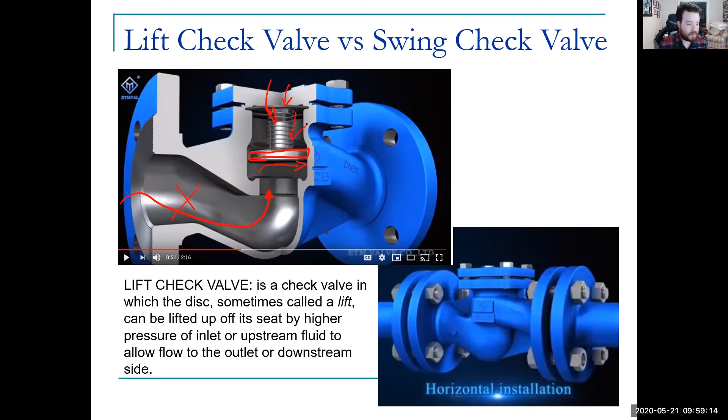A swing check valve operates in a similar sense, but there is no spring. What it's utilizing is the weight of the disc.

A check valve in which the disc is a movable part to block the flow, swings on a hinge either onto the seat to block reverse flow or off the seat to allow forward flow.

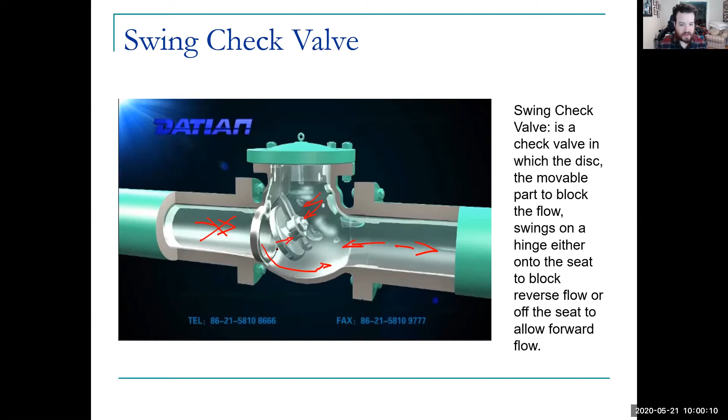So same principle. You have flow going in this direction. It's going to be pushing against this disc, and you're going to have flow that's going around it and keep going. And as soon as this is lost, any flow that's going to go in reverse, this swing check is going to come backwards with the weight, and it's going to close off and not allow any backflow.

So let's talk about heat exchangers and coolers. Heat exchangers transfer heat from one substance to another. One substance needs to be hotter than the other. Heat flows from hot to cold, and the greater the temperature difference, the faster the heat transfer.

What is it called, a heater or a cooler? And it depends on what heat transfer you want.

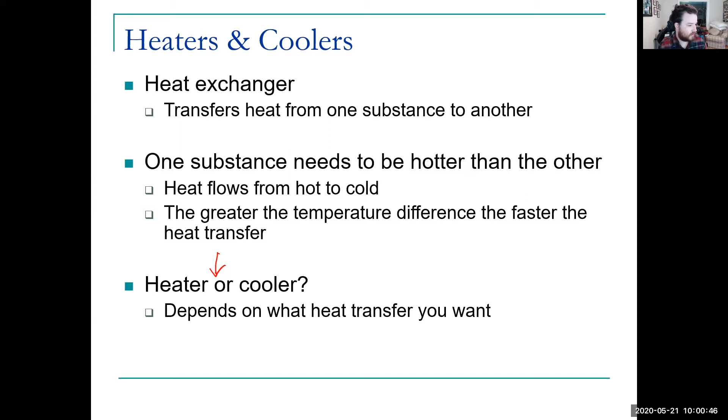Classification is by the path of the heat flow. Indirect or surface, through the plate, tube, or other. And direct contact is fluid to fluid.

And then relative direction of fluid flow. So you have parallel, you have counter, and you have right angles as a cross flow. And then contact, again, direct or indirect. And what do we mean by parallel or counter or right angles?

So starting with right angles, what you'll have is that two pieces of your flow will look like this. You have your hot fluid, and then you have your cold fluid, and they're flowing at a right angle to each other.

Parallel is like this. Now remember, these are still all in non-contact with each other. There's going to be plates separating or tubes separating them. So parallel is like this right up here.

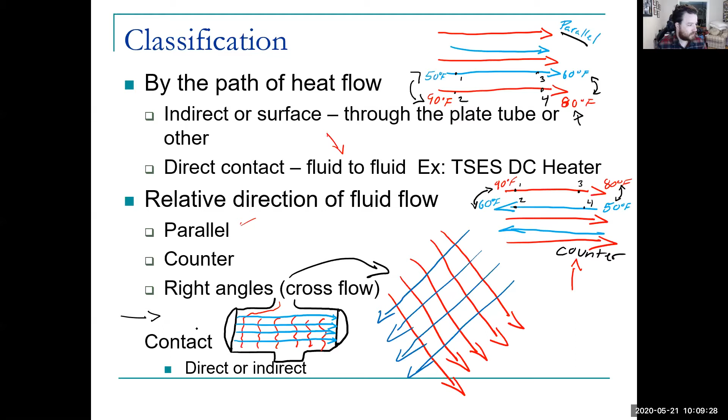Okay, so classification continued by the number of passes. You have single pass, that's fluid in one direction only, so they just pass each other once. Two passes is the fluid changes direction in the second pass. Four passes, multiple times, and additional passes.

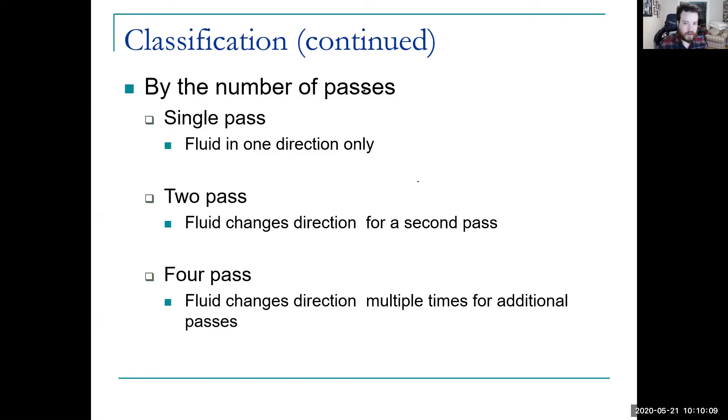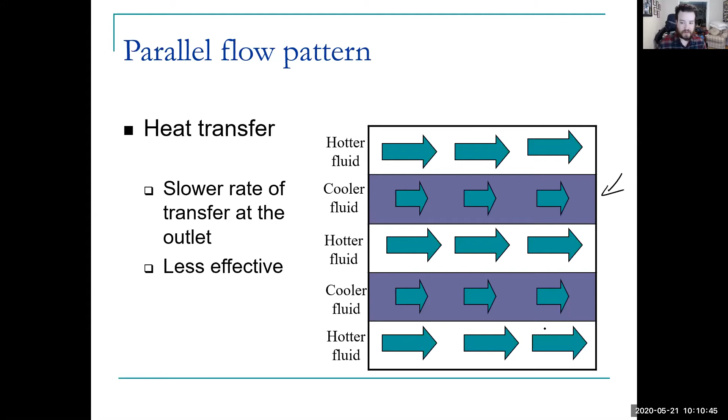Let's go on to parallel flow. Here we go, everything that I just went over. So basically we have the hotter fluid, the colder fluid, slower rate of transfer at the outlet, less effective. Counterflow, less area required to remove heat, heat transfer equal at all points. It's the most common, like I said, it's the best version. You're literally not changing anything inside of the mechanism. The only thing that you're changing is the direction of one of your fluids, and you gain so much.

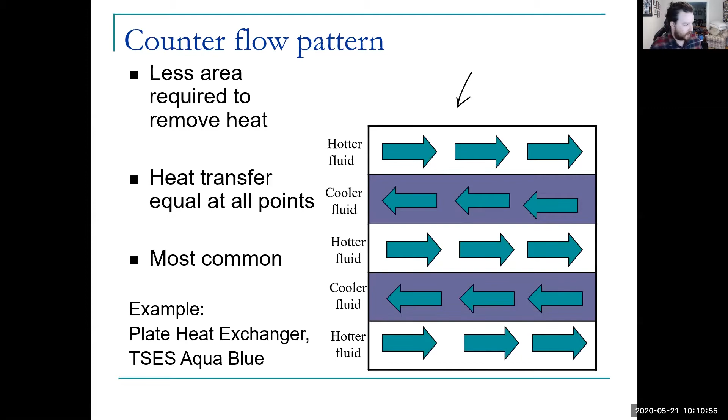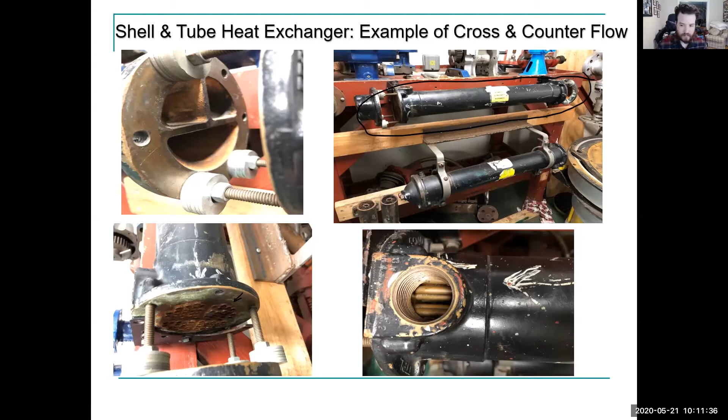Someone say something? Okay, no, it was just you. It kind of glitched out. Okay, sounds good, all right.

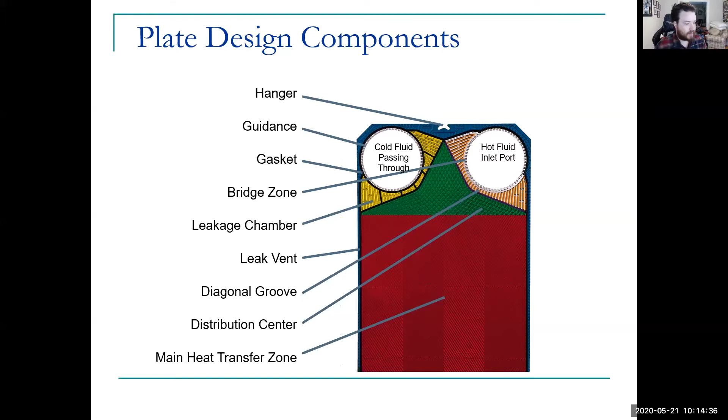Could you go back to the slide that had the side view? There's a question in the chat that says, can we change the gasket if it fails, or should we just change the whole plate? Pretty much those things are glued on, so you're going to have backup plates, and you can remove one of the plates. You just basically would order a new plate.

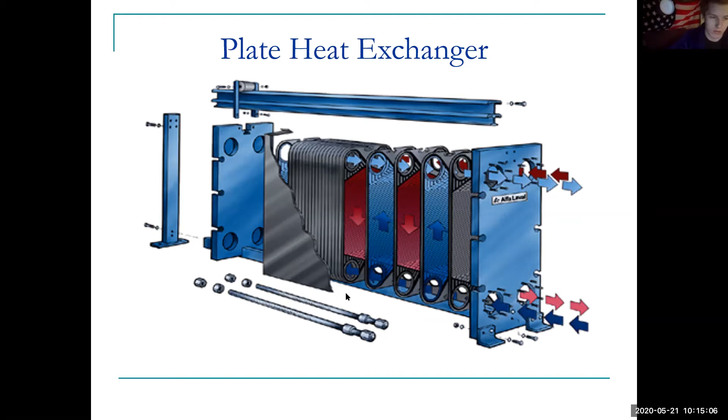So you have these high performance seals. You have your gaskets along the side, and you can see basically here where it's making that seal. Not only is it sealing the fluid from coming out, it's sealing the fluid from each other as well.

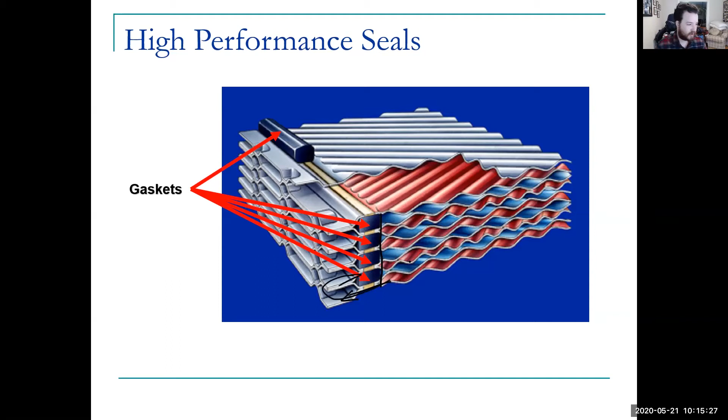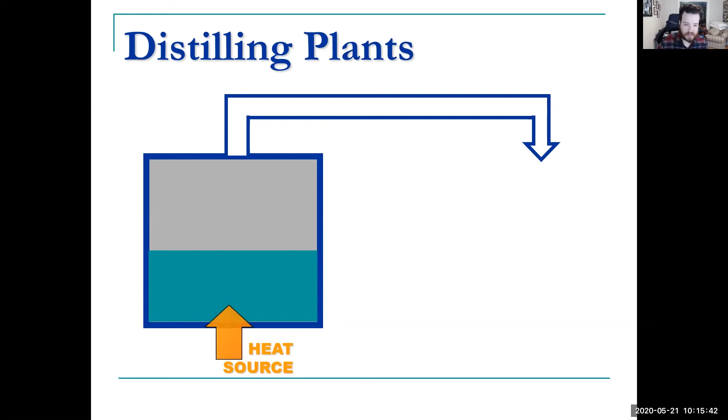So let's get into distilling plants. A basic distilling plant: you have your heat source, you have your salt water. Remember, we're going to be utilizing salt water. We turn it into a vapor. That vapor is going to be just water at that point.

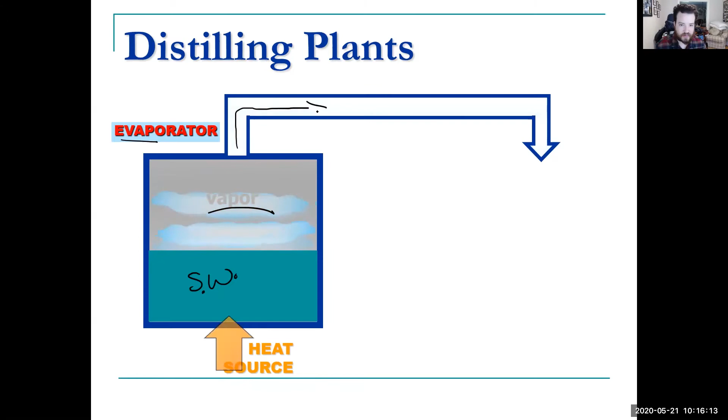This is called our evaporator, it's evaporating. So that vapor goes through a pipe, it's removed from the evaporator, and as it goes through a pipe it goes into a condenser. It's condensing back into a liquid, and we're removing our heat that was given to it in its heat source.

We have now turned it into a different type of liquid. It's called a distillate, so it's distilled water.

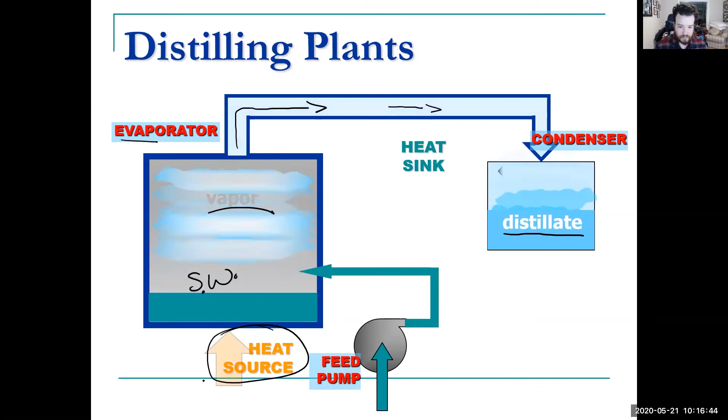Now, as we remove more and more salt water, we need to add it back in. So we have something called a feed pump. We have our salt water supply, it's entered in. And now we have something called a distillate pump, and we are removing all of our distillate that's been created, and that's going to our distillate tanks or our potable water tanks.

Now, the big byproduct that comes from this process is brine. When you boil salt water, part of the process is yes, you're getting clean vapor, clean H2O coming from it. But what you're leaving behind is all of the minerals, all of the salts, everything that's not hydrogen and oxygen. That's called brine, and we have to get rid of it somehow. We have a brine pump, and basically all it's doing is taking the brine and ejecting it overboard.

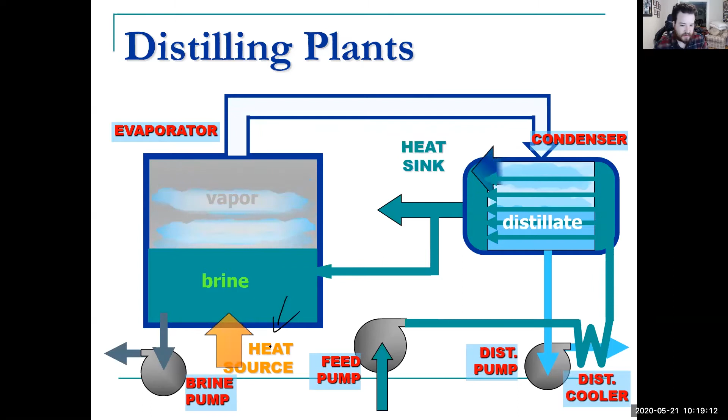Instead of using just regular old salt water that you're not going to use again, you might as well use the heat that you're going to not use after it goes into the condenser to preheat your feed water. So you're banging out two things with one stone: you're cooling your distillate into a liquid that's pumpable, and you're heating up your feed water.

And the last thing we also have here, if you look, what's going on at that point? What type of heat exchanger are we doing here? We have a cross flow right there, but we're also doing something else. Our big heat exchanger, if you were to put a circle around this whole piece, what also is happening? It's another type of heat exchanger that we have.

Is it parallel? Nope, parallel would be as if they were flowing in the same direction. This is going to be counter. But that's the giveaway right here in this little spot. We have our coldest point going against the spot that's not at the hottest.

All right, any questions on this before we go on?

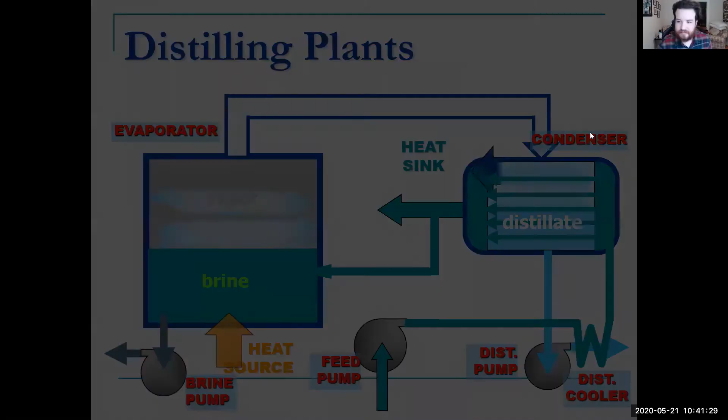So let's go on about distilling plants. As we go through, we're going to talk about high pressure and low pressure systems. High pressure is anything that's above atmospheric.

Atmospheric, as we've talked about before, is what we're standing in right now. It's at sea level. And thank God this is a shipping class because everything will be at sea level. So we only have to worry about our absolute pressure, which is at 14.7 psia. Now, if that was PSIG, or gauge, that would be at 0.

Now PSIG, as we talked about, is pressure gauge. It's a different type of reading you can get, different types of gauges out there, where zero point is 1 atmosphere. Now we also have inches, how it can be measured, and that's when you go into vacuum.

And then what we have here is our boiling point of water in Fahrenheit and in Celsius. So as you see, as we go up in pressure, we are going to be increasing our boiling point. And as we decrease in pressure, we are decreasing our boiling point. So they're directly related to each other.

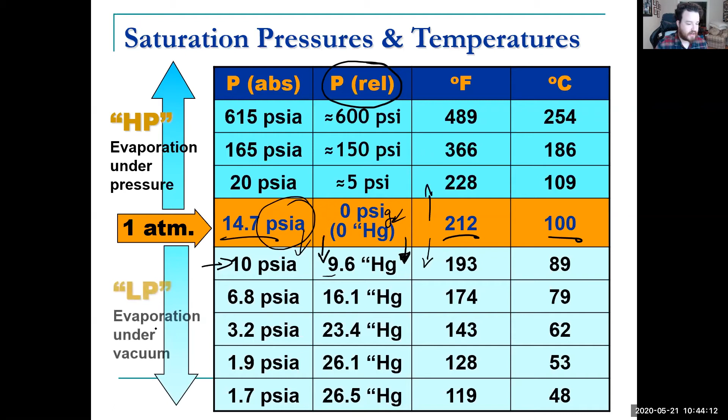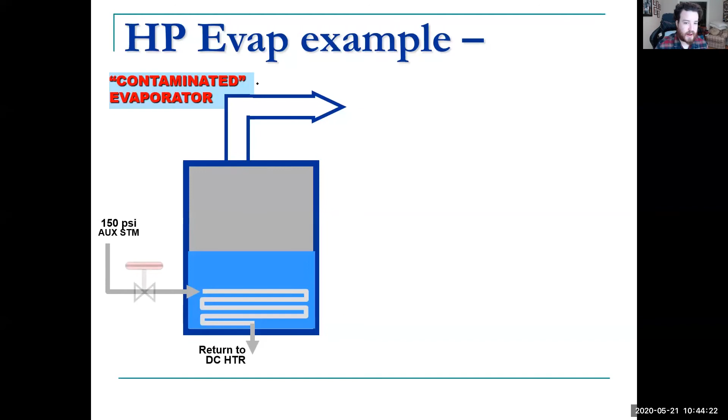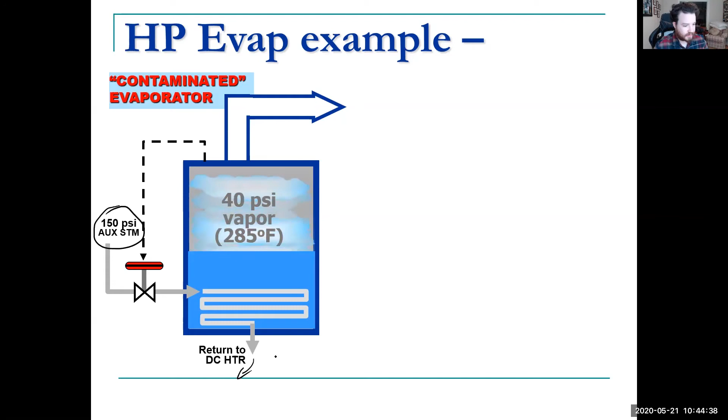So a high pressure example is the contaminated evaporator. Our heat source right here is 150 PSI auxiliary steam. It's returning to the DC heater, so it goes in, goes out, it's done, it did its job, it's given off its heat. So we have 40 PSI vapor at 285 degrees Fahrenheit. That is at its boiling point.

All right, so we're using a lot of energy here to boil water. You know, we're above, not double, I'm sorry, we're almost at another 100 Fahrenheit needed, and we're at 40 PSI. Why are we wasting so much of our auxiliary steam to do that?

And it's all going to where it's going: your fuel oil heating, your galley steam, and your lube oil heating.

All right, the one thing we have to know about the fuel oil on the TSES is that—let me start over. The fuel oil on the TSES, what the boilers were designed for, one more step in quality down is what? What do you think, how nasty of fuel do you think we use on the TSES?

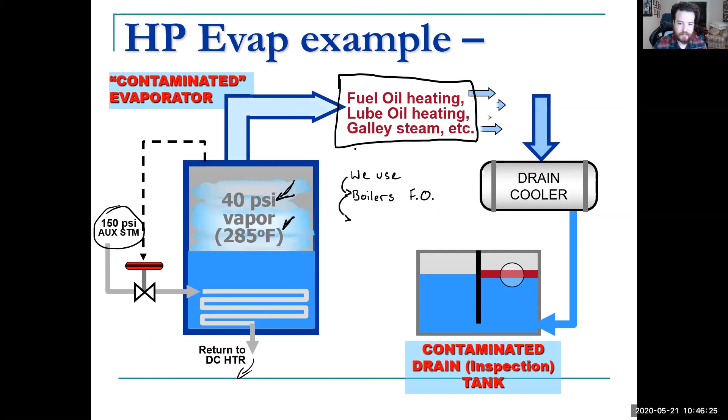So like when you take a cup of water and dip it into a pond and let it sit, all the densities filter out of it. You have the really nice clean stuff on top and then it just kind of goes through. The same thing kind of happens with fuel oil. When you pull out oil from the earth, it has every single level of fuel in it, and diesel being the nicest, it usually sits up on top.

And then it goes down from there. You have gasoline, then you have home heating oil, and there's certain layers. We have to use this fuel oil on this level. The next level is what our boilers were designed for. And the next level below that is asphalt.

So the stuff we use on the ship is bunker B. And we were designed to use bunker C. And the stuff below bunker C is asphalt. That's what they make roads out of.

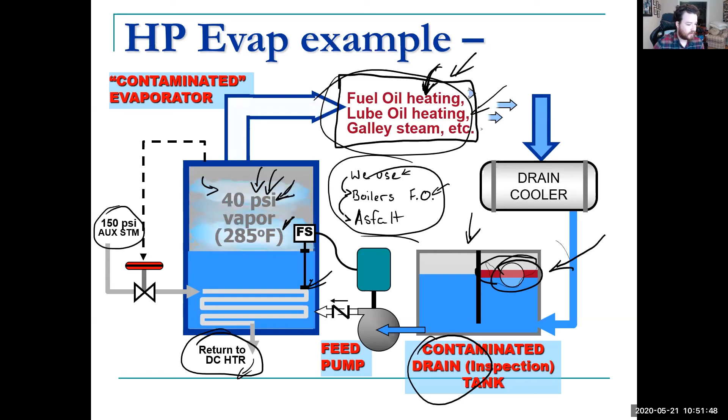Any questions on what is going on with our high pressure evap system, or why we use a high pressure system or anything like that? Okay. We use the lower grade oil just because it's cheaper. Yeah, and also when you guys go on a cruise, you actually see it.

It's not only old, the ship, but it really shows how much it's designed for that lower end fuel. You'll see it when we go into port, and that's the biggest example. You don't have a frame of reference for bunker C. No one does, I don't either. We couldn't even get it when I went to school. But it was designed for this lower end fuel, not because our school wanted it, but because the company that built the ship wanted the cheapest way to steam across the ocean. Where can you cut your cost? Fuel is one of the biggest costs.

So when we go into port, certain ports will have restrictions on how far out you have to be, like Denmark. You guys are probably going to go to Copenhagen one of these years. When you go into Copenhagen, when you're a certain distance from them, you've got to switch over to diesel fuel because it's the cleanest burning. They don't want any sort of smog coming anywhere near their country, so they'll have you switch over to diesel fuel miles out when you're at the sea buoy.

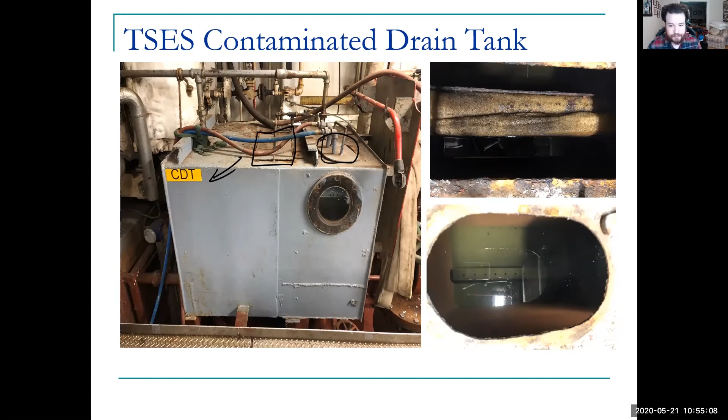Any other questions before I jump into low pressure? Okay, so low pressure evap. We're going to go into the first one: this is the submerged tube type evaporator.

This is the big thing about these I want to bring up. When you look at submerged tube type, yes, the big thing is that it's using a submerged tube in order to heat the seawater and turn it into vapor. That's the big identifier, and that's why we call it a submerged tube type. But the other thing you have to recognize is where the heating is taking place. And the heating is taking place in the evaporator.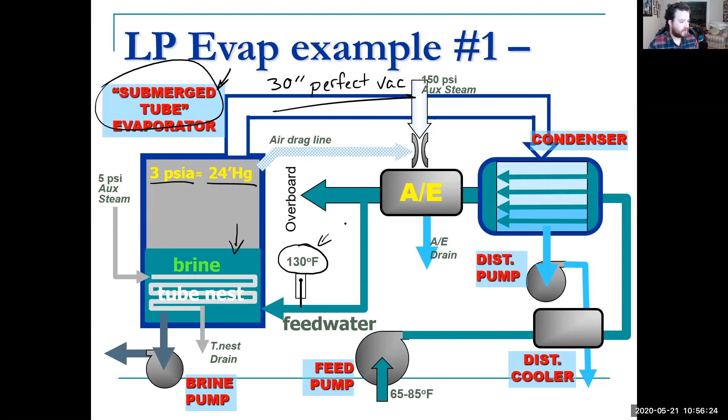The feed water is entering at 130 degrees Fahrenheit. It is, even though we're at 3 PSIA, which is about 24 inches of vacuum. Remember, 30 inches is a perfect vacuum, so we're damn near close vacuum. So even though it's entering at 130 degrees, it only has to go up like 10 or 15 degrees in order to boil, and that's all this 5 PSI auxiliary steam is doing. We have to always think about our heat source and where it is in the system.

So as we go through, we boil our water. We still have our brine ejector, it's still going overboard, that's our excess salt water. It's heavily dense salt water that's not going to be able to boil. It goes through and our steam travels up this line, and we go to our 150 PSI auxiliary steam. That's the first thing we're going to be hitting.

After we go through our condenser, we become distillate, and we're giving off our heat to the feed water. That feed water is going off, and that's going to hit our 150 PSI auxiliary steam. There's a lot going on here, but let's just go and start at our feed pump. Our feed pump comes up, and again, we go to a distillate cooler, so we're cooling down our distillate and gaining a little bit more heat.

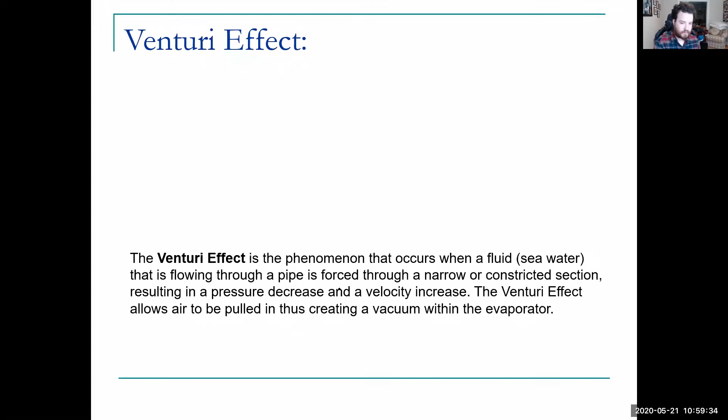So when we talk about air ejectors, we talk about the Venturi effect. The Venturi effect is basically you have an inlet and it's a high pressure - this would be our 150 psi auxiliary steam. And now your suction, that's going to be coming from your air drag line - that's from your evaporator.

And the Venturi effect is the phenomenon that occurs when a fluid, seawater or steam, flowing through a pipe is forced through a narrow or constricted section, resulting in a pressure decrease and a velocity increase. The Venturi effect allows air to be pulled in, thus creating a vacuum within the evaporator.

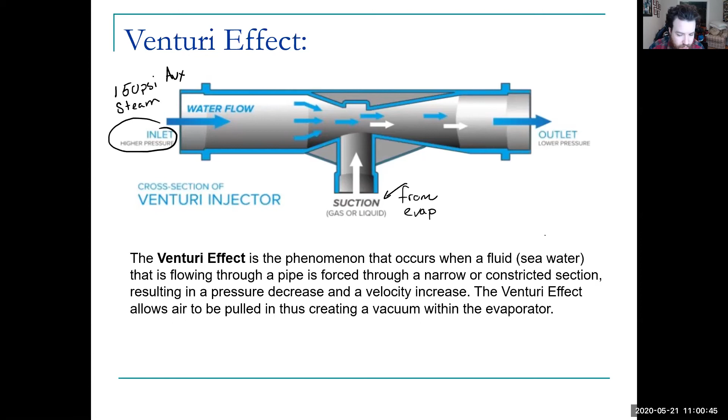So you can use basically, you have your ejector pump and it's utilizing salt water to do this. And this is how they eject brine - this is how it's sucking out brine from our evaporator.

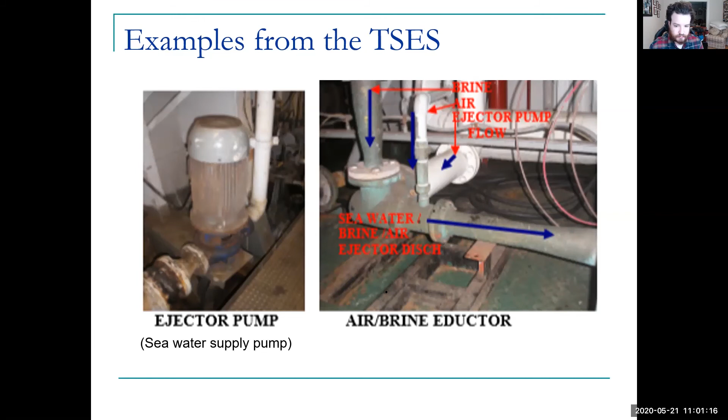And this all happens due to this: under evap feed pump pressure, 15 to 20 psig, water boils at 225 degrees Fahrenheit. So on this side of it, 225 is the boiling point, so 172 is way under. We're good - we're not going to have any water that's going to be boiling inside of our pipes.

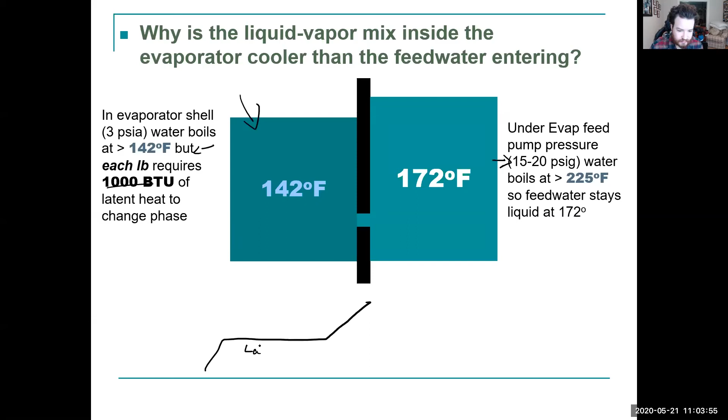But as soon as it goes into our vessel, as soon as that goes into the evaporator, water boils at 142. So each pound requires 1,000 BTU of latent heat to change phase. We talk about that whole fact - this is our latent heat, this is our sensible. Remember, we're going from pure liquid to pure steam just on one side to the other of this device.

We're going from here of 172, and this is 225, and we're jumping all the way over here - but not on this chart. We're jumping down here, so we're basically going from here to there because we're lowering pressure. But we still have to give up that latent heat because we're traveling this way on the chart, even though we're going down on our pressure. And that's what's happening inside of this whole entire device.

So in cooling to 142, each pound can donate 30 BTUs of sensible heat in the process. Therefore, it takes 33 pounds of feed cooling to 142 in order to create 1 pound of vapor. So for every 33 pounds of feed that we put in, we get 1 pound of vapor coming out.

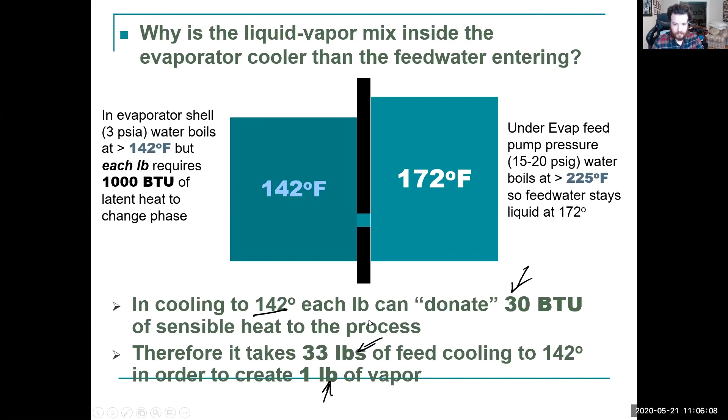Before we go into multi-stage, is everybody good on those two concepts? What was the flash - is that outside? What was inside again, real quick? Submerged tube is going to be inside.

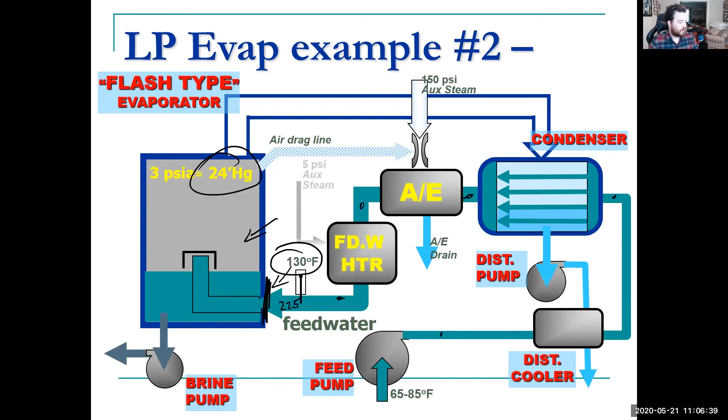So the submerged tube type operates inside of the evaporator as its heating source, whereas the flash type, the heating source is outside of the evaporator. All right, thank you. Any other questions?

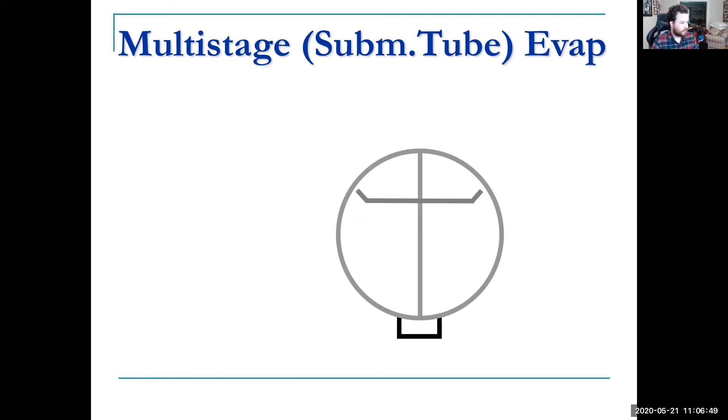So multi-stage - this is a multi-stage submerged tube type evaporator. All right, so again, feed pump, salt water.

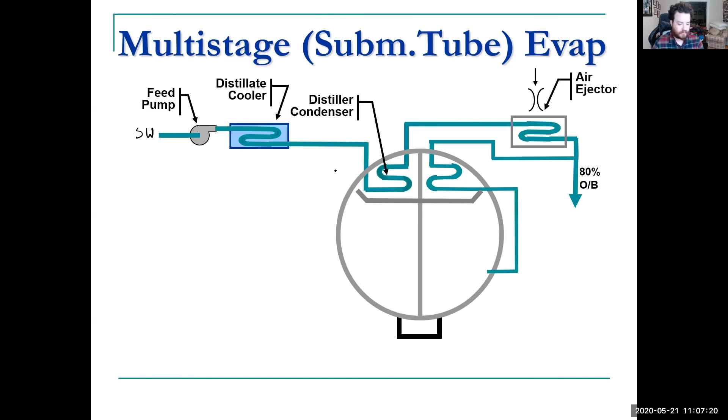Man, let me follow this line. All right, let's get this all up.

So as our salt water goes through, we're under our feed pump. This is a distillate cooler, so our distillate's going to go through that, and we're already going to preheat our feed water. Now we're going to go through our distiller condenser.

So we're going to be condensing any of the vapor and turning it into a liquid. So we're going to be doing a heat transfer. All right, we get to preheat our feed water again.

As it comes through, we go into our air ejector. So our air ejector, again, it's going to be a mixture of not only the steam that it's going to be utilizing, but also any of the non-condensable gases that are in this chamber, in this vessel.

And that's going to be hot, so it's going to be going through and it's going to be giving up heat again. So our feed water is getting heated again.

So right now we're at what, one, two, that's our third time that we're heating up, and we're not even trying to heat it as its main. That's not even like a heater. We're not putting a flame to it. Our main goal here isn't to heat up our feed water.

It's to cool down our distillate. It's to cool down our vapor and turn it into a distillate again. And the other one is just garbage steam at that point, so we might as well take the heat.

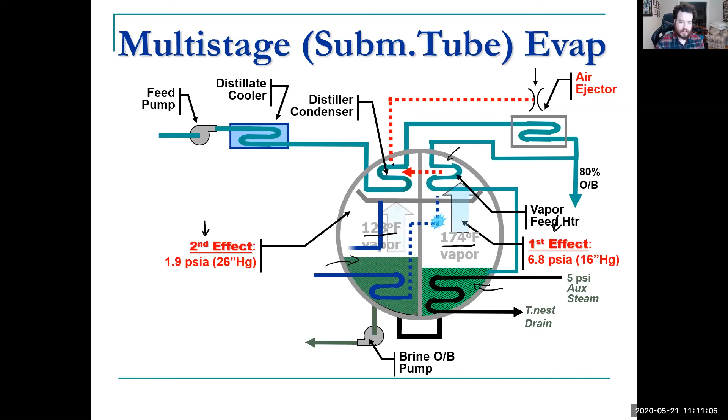So again, it condenses on our feed water condenser, and they go into a flash chamber. The flash chamber is ensuring that anything that is not a liquid will flash into either, basically if it's not at the proper state, it's going to get dragged back in, and it's basically a vapor.

It comes back in, it cools down on these coils, and then they re-enter into the flash chamber. They get sucked out by the distillate pump, they get cooled off by the distillate cooler, and then they go to our potable water tanks.

Now we have a three-way solenoid dump valve, and a salinity cell. We'll talk about a salinity cell at the end, but what it's testing for is a certain level of salinity. We want to be under a certain level, and if we are above, this will dump to the bilge. If it's below the certain levels of salinity that we want, it goes to the potable water tank. So that's our automation to keep ourselves healthy, because this is going to be our drinking water.

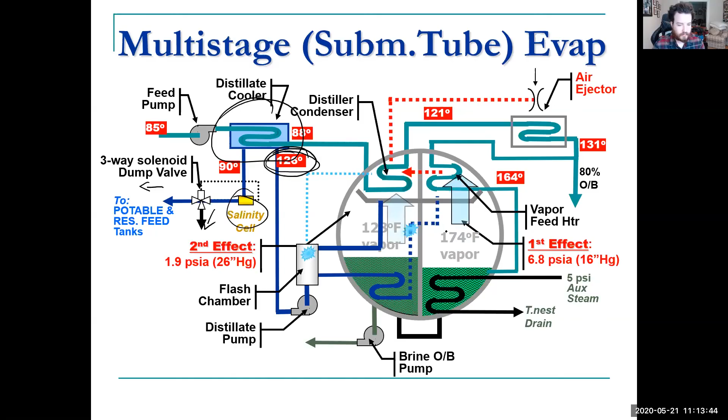So, multi-stage submerged tube type evaporator. The only heat source that is externally added is in its first effect.

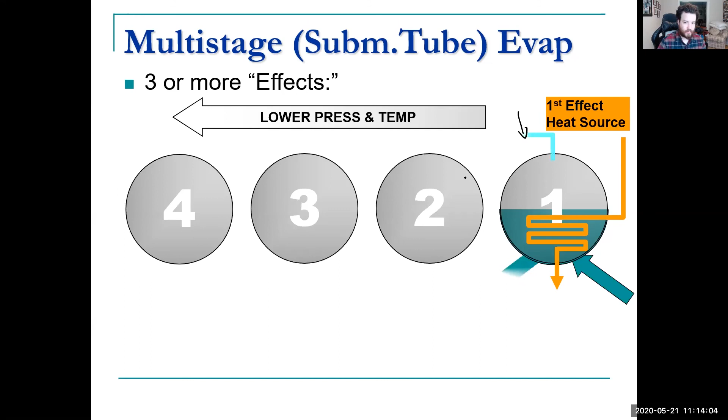Once you get past that first effect, the vapor that comes from the first effect is now being used to heat up the second effect, and so on and so forth.

And the way this is possible is because each effect, as we go down, is at a lower and lower pressure. And as we go lower and lower, our temperature to boil becomes lower and lower.

So this isn't some sort of plugging an outlet, plugging a surge protector into a surge protector situation. We're actually able to do this because each one of these is lowering its boiling point, and we're using the energy that came from the other effect.

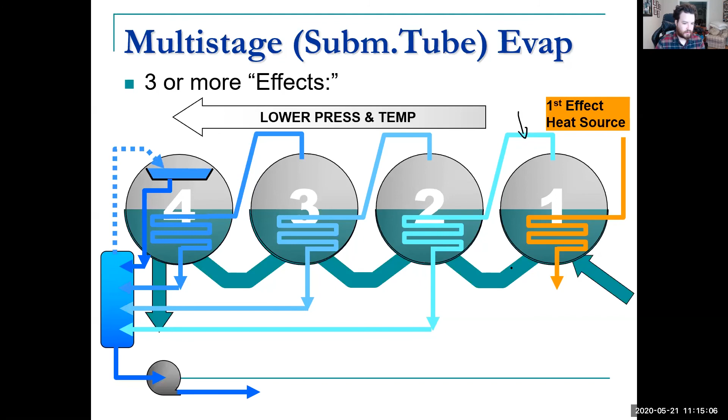And finally, as they all come together, they go into a flash chamber. Any of this liquid that comes in, anything that doesn't condense all the way, gets sucked back up, cooled off, and then re-entered into our distillate pump and off to our potable water tanks.

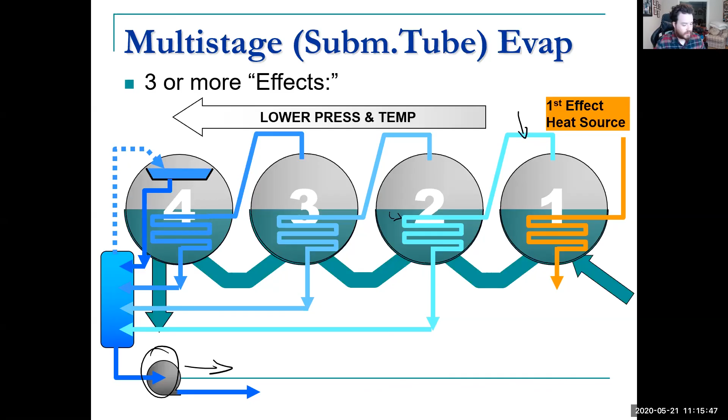Okay, that's a submerged tube type. I'm going to be going on to a flash evap in a sec. Does anybody want to go over the submerged tube type multi-stage evaporator? Everyone feeling pretty good? Okay, almost done guys.

So again, multi-stage flash evaps, same concept: we want to get as much heat out as possible. We don't have to follow it all the way through. It still goes through a distillate cooler, still goes through distillate condensers, we're still going through an air ejector. But the last thing, instead of having a tube's nest down here, we've got a feed heater right here.

So we are entering in pretty much the same concepts. We are air dragging away any of the non-condensables.

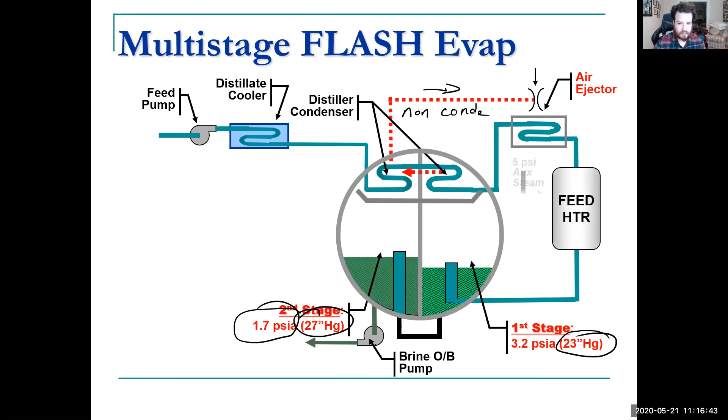Our second stage is sitting at a nice clean 1.7 PSIA, almost at a 30-inch vacuum. Remember, 30 is perfect. First stage is a little bit lower of a vacuum, it's at 23. Our vapor is sitting at a nice 142, and the second stage vapor is at 119.

We have no flash chamber here because everything is going to be a liquid as it comes through. And again, we have another salinity valve. Just because it's a flash evap doesn't mean that we shouldn't check and make sure that we keep ourselves accountable for what we're doing. We don't want to fill our potable water tanks with salt water.

But still the same concept is continued. We are entering this first stage above our boiling point. Let me erase all the ink on the slides. It's entering in at 172, but it turns to a vapor at 142. The only way that it's not turning into a vapor right here is because it's under a pressure coming from that feed pump all the way back there. Okay.

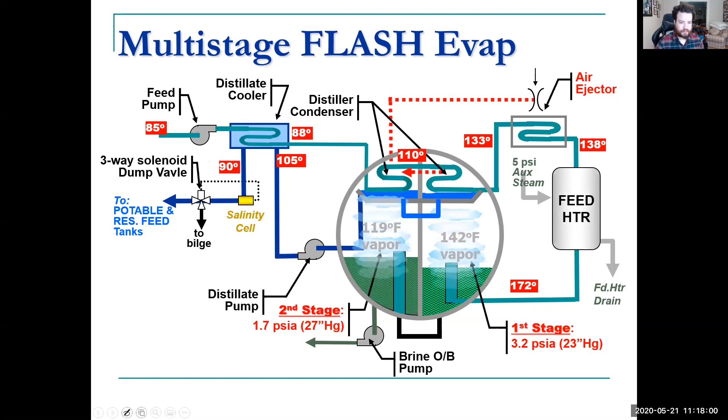But from what we have here is from saltwater feed pump right here, we go to a distillate cooler right there, and then from there we go to our second stage condenser, from there to our first stage condenser. We come out, we go to an air ejector condenser, and now we're going into our feed heater. So this is where all that steaming takes place. And then to that, to the first stage flash chamber. And that's just the way the water travels before it even enters the flash evap.

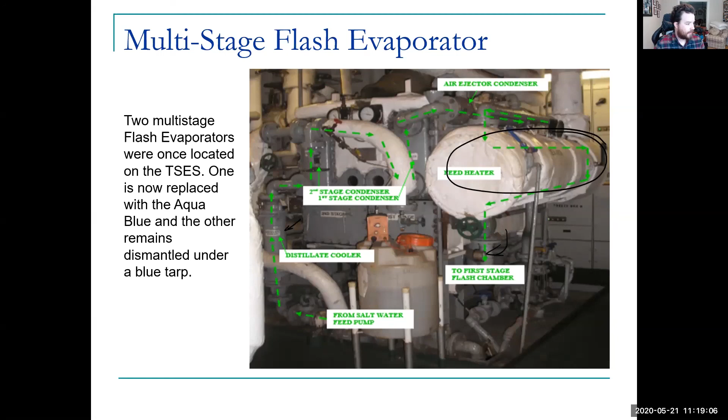All right, and finally let's talk about that salinity cell. So what we're doing is we have an AC source, we're turning that into a DC source using a transformer. We're basically using an amp meter, so we don't want current going in here. A higher current is going to go to a higher level, so if we have higher levels of salinity, it's going to make it have a higher current.

And that's not good, so that's what we're looking out for. And that's going to send a signal to the dump valve.

So pure 0 ppm of dissolved solids means there is nothing in the water besides hydrogen and oxygen. There's literally just H2O floating around in there. Distilled water is a very poor conductor of electricity; it's the salts that conduct the electricity in the water. As the salinity increases, the conductivity of the distillate increases. Seawater is a very good conductor. A salinity meter measures current, although the meter scale is in ppm.

So as the current increases, we are going to have a more dense distillate, more salt water. Boiler water is very pure distillate. A 3-way dump valve is set to dump distillate to the bilge if the salinity cell detects impurities greater than 3 ppm, and that's for boiler water.

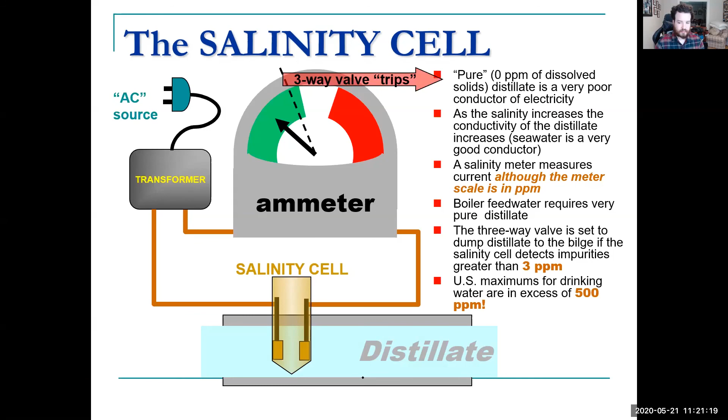Now, a salinity cell basically looks like this. On the TSES, it's just a nice little probe that enters in. This is a very old-fashioned way of looking at what these things look like. They are not that big anymore. I think the biggest one I've seen, the entire thing sits inside of something like a little vitamin D bottle. It's really nothing too crazy. These things are quite small on these pieces on this ship. All right, so that is it.

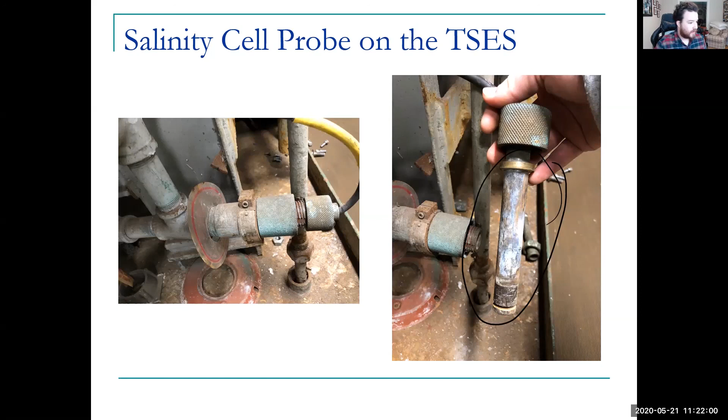You guys have any questions on anything of that?

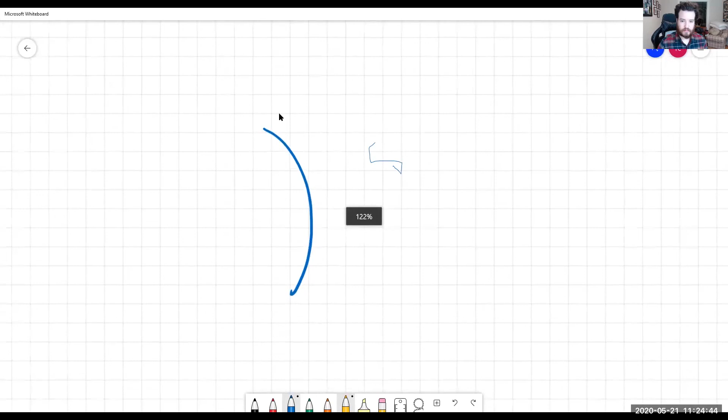Come on. This symbol, right? Yeah, yeah, that's an air ejector. Okay, all right.